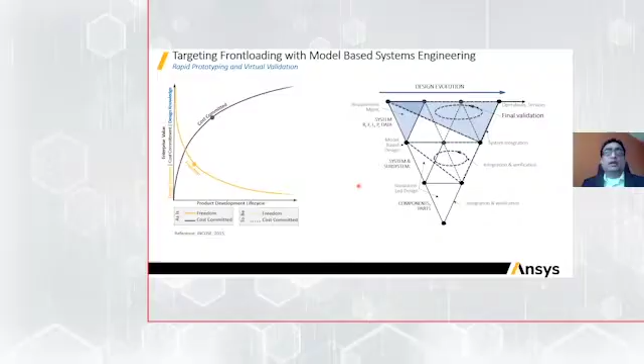Because of these gaps in the current design process, lots of cost items get committed very upfront, at a very early stage. And as the cost gets committed, freedom for change in the design, freedom for change in component selection gets reduced and restricted. Here, the validation exercise comes towards the end, and as mentioned, validation is very expensive.

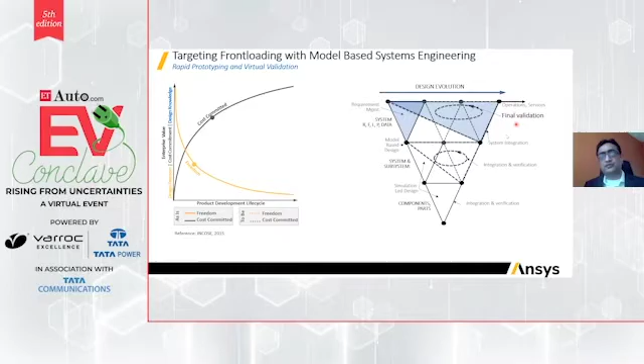So to deal with this problem, companies are now moving to what we call virtual prototyping or rapid prototyping. I must give a disclaimer that rapid prototyping here doesn't mean 3D printing, since that term is also used elsewhere. What we're discussing is: we essentially bring our last validated design, if a virtual validation platform exists. We take the last validated design, then bring in the new requirements, and change a few modules or components in a virtual mode, and check if this change meets the new design and performance validation requirements.

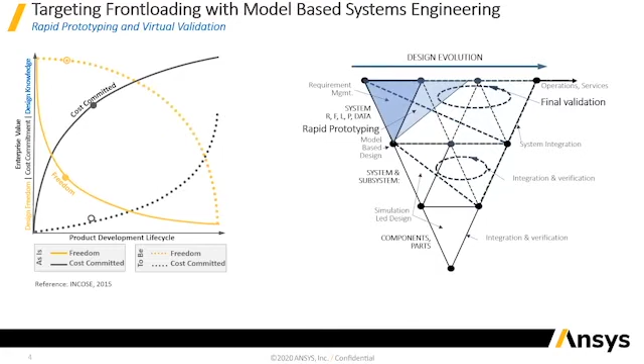So this can be done at a very early stage. And if you can see over here, by doing this step, the design flexibility increases and cost commitment at the early stage decreases. This blue new triangle represents rapid prototyping. That's precisely the change from a constrained design process to a more flexible design process, carrying knowledge from the old system to the new system.

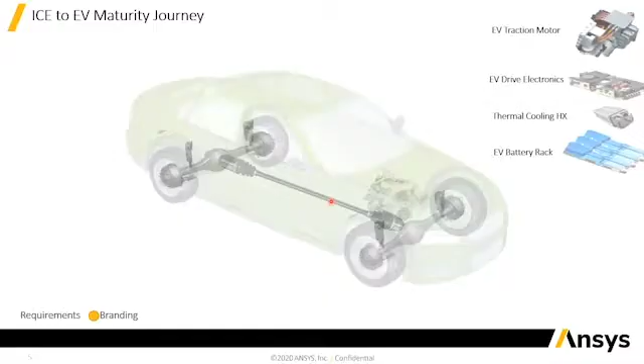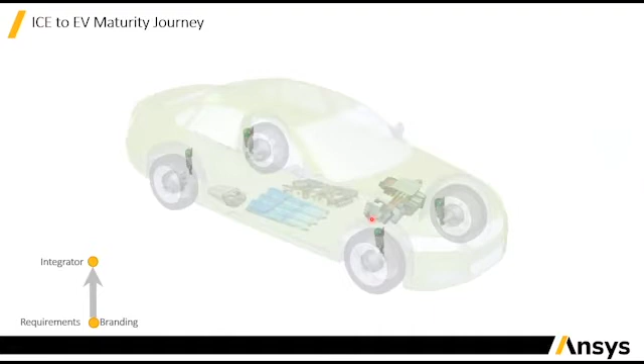Now let me share what happens specific to EV. An EV requirement typically starts with branding and then what sort of vehicle segment it is. Post that, it's mostly a case of an ICE vehicle being converted into an EV. So majority of companies in the world, and in India also, start as an integrator. Many design components like motor and battery are outsourced and those components are integrated. This process has the advantage of outsourcing the design and accelerating time to market, but it also has its own challenges, like achieving system efficiency, range, and related issues.

Moving forward, OEMs are moving towards more in-house designs. So in in-house designs, all components are designed and developed, and for that, extensive virtual simulations through FEA, CFD, and electromagnetic analysis are done.

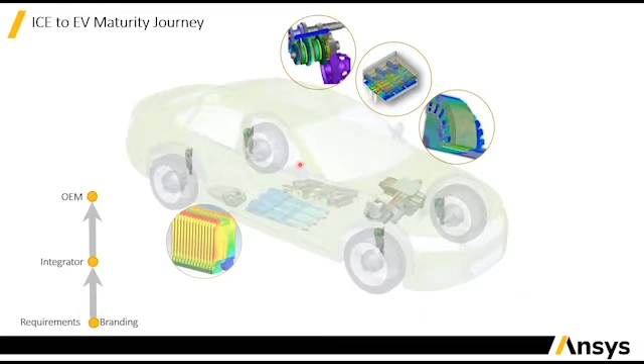And these methods are quite well evolved, quite well developed. Best practices are in place. Due to a very large number of design combinations to be studied, because of a complex interplay between hardware and software, MBSE methods are taking over as a key design process development.

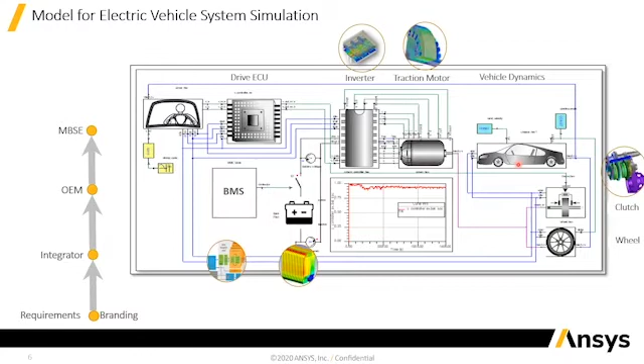Here MBSE is described in a block diagram. All critical components like EV drivetrain, battery, motor electronics, inverter, clutch, wheel, mechanical, vehicle dynamics are integrated, along with the software component. One of the most important things to remember is we are not leaving behind the 3D studies described earlier. In fact, all 3D studies can also be integrated into the MBSE framework through lightweight behavioral models derived from these 3D studies.

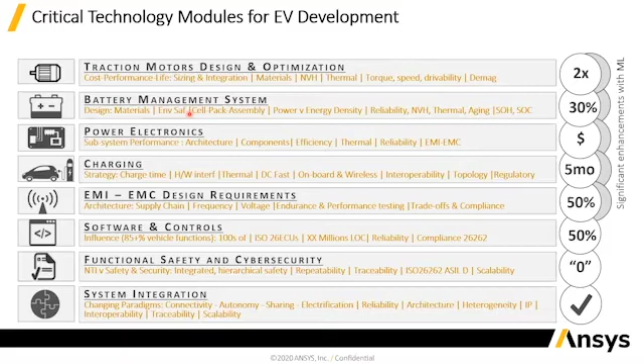Let me also briefly describe the critical modules of motor and batteries. I won't get into detail, but just to mention that when you don't have a physical component ready, when you're in design mode, these are simulation practices that are proven and practiced globally, with strong metrics like time to market or cost saving. What we're seeing is that if we combine machine learning further, the return from this component level design process increases considerably.

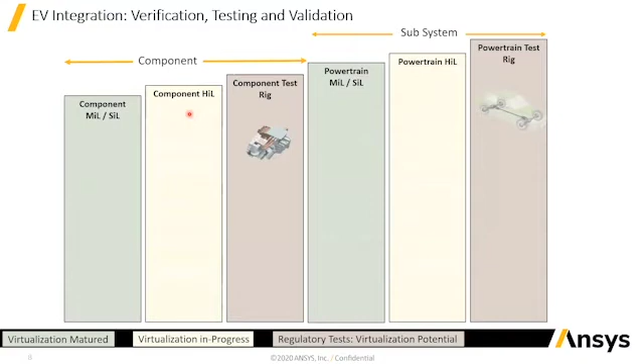Next I'll show how component level design processes can be used in verification, validation, and testing methods. This is a kind of standard testing scenario that all typical EV models have to go through. It starts with component level model-in-loop, software-in-loop methods, component level HIL, and then rig design.

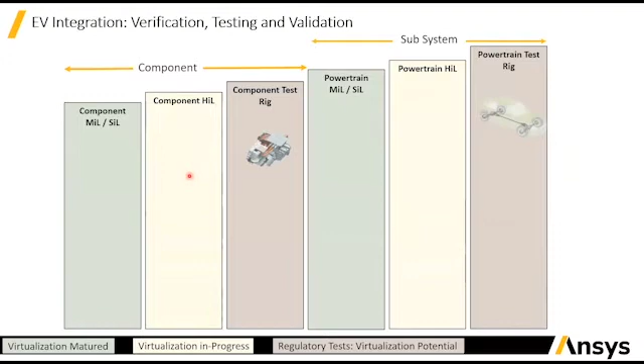If you dissect this further at the component level, motor and battery subsystem designs are first verified, where both software and physical components are studied. Hardware components are studied through low fidelity models, but the trend we're seeing globally is using high fidelity models through 3D simulations, or test data if available, but most likely not, since this is early stage verification and validation. That's how it's helpful - before any prototype, you could do model-in-loop and software-in-loop. Similarly, for hardware-in-loop, the same simulation model-based behavioral models can be used.

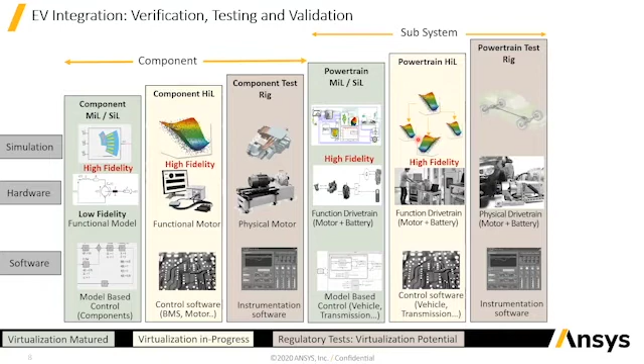What is the advantage of doing this? You don't have to wait for a motor to be built, put on a bench test, generate an efficiency map, and then do validation. Much before that, you can assess the performance of the motor and battery. The same way, you can assess the performance of the entire powertrain subsystem, including power electronics, motor, and battery together. Going forward, finally, the vehicle subsystem and vehicle system level test, where you also include vehicle dynamics and road conditions.

So essentially, in this entire map, MIL and SIL for component level and powertrain are already virtualized. HIL methods are in the process of being virtualized, where more virtual plant models are getting used. I'm also going to talk about the entire virtual system model, how you can create scenarios, put in the terrain, use the software plus other models developed throughout your product development cycle, and integrate them to do a virtual system study test.

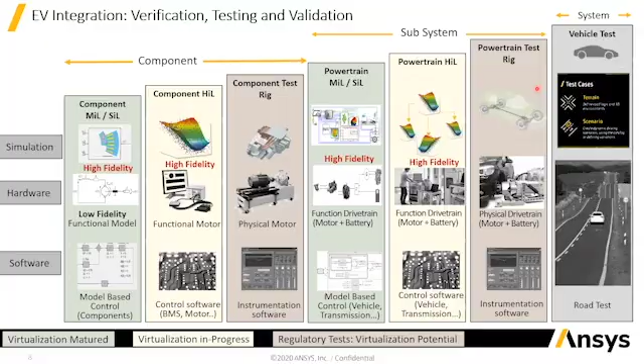This shows a model structure for virtual performance validation. We're not getting into detail, just want to highlight that in this model structure, you can have a driving scenario sitting at the top that interacts with the vehicle controls, vehicle dynamics, and BMS motor controller, which is integrated with the physical models for battery, motor, inverter, transmission, and so on.

This physical model comes from either 3D simulations - the most likely scenario if you do not have any prototype ready - or it can use test data, or even 1D low fidelity models if the 3D models are not ready. That's how the model stack and platform are generated.

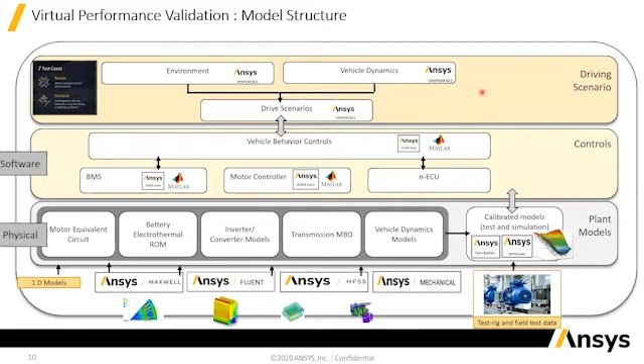Once this platform is generated, it takes time because calibrations, model best practices, and component model fidelity are all very important for a robust and accurate virtual validation platform.

Once the virtual platform is ready, that has a huge advantage. It provides the ability to perform a large number of drive validations, like vehicle parameters, wheelbase and size, requirements, acceleration demand, road conditions, new vehicle requirements, or change in requirement midway through product development, or even meeting the constraints required by safety. Everything can be studied in a virtual mode.

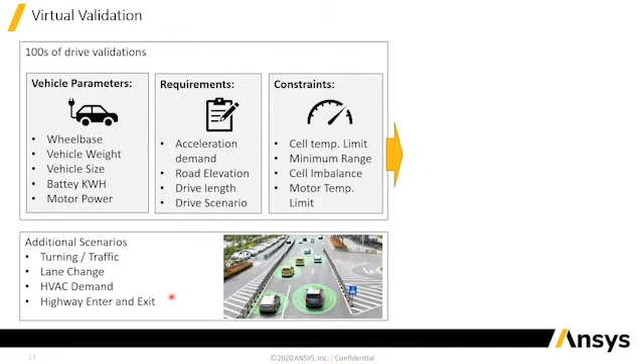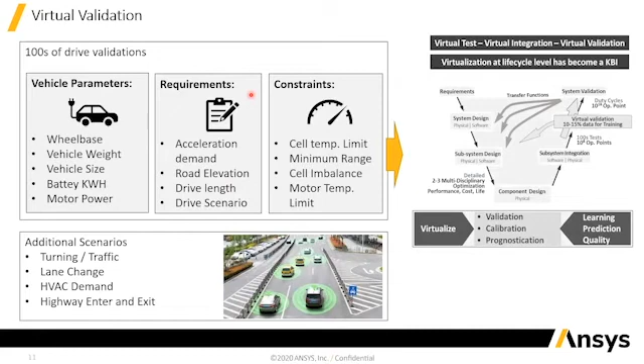And not only that, you could add scenarios beyond EV, like if you integrate autonomous scenarios as well, sensors, lane change, traffic, HVAC demand, and so on. This provides huge flexibility, and finally results in a robust virtual platform that can be extensively used for validation, calibration, and even extending to prognostication of the vehicle and vehicle components.

So how is it done? I'll share a short video, but before that, this can be done by combining all vehicle models, be it motor, battery, BMS, inverter, ECUs, vehicle dynamics, combining that with the vehicle environment, and combining it with the software development. You can then use AR, VR technologies to create scenarios. For the scenarios, you could use OpenStreetMap.

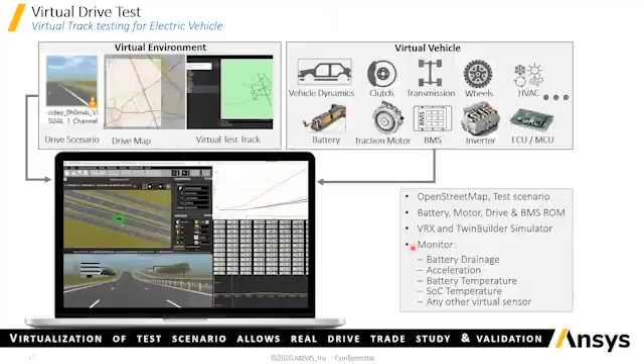Over here, we have used VRX and Twin Builder Simulator in this example. You can use this platform for battery drainage, acceleration, checking battery performance, range, SOC, temperature, or any other virtual sensors that otherwise you would want to test in the physical world. So let me move to the short video demonstrating this entire capability and workflow we discussed so far. Let me start this video.

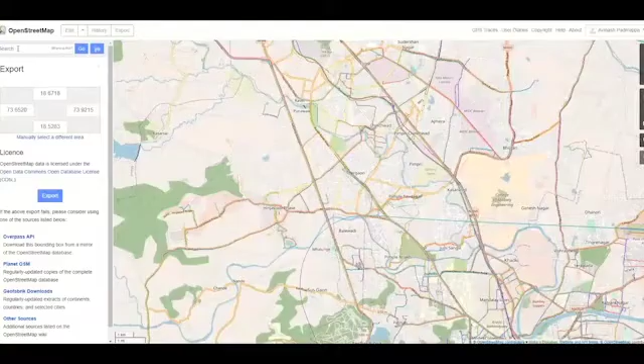So here we start with creating a virtual scenario. In this demonstrator we have taken a small patch near Pune on the Bombay-Bangalore highway, and this patch can be imported to create the scenario. The scenario we are creating has a certain set of elevations. We can add road details and so on.

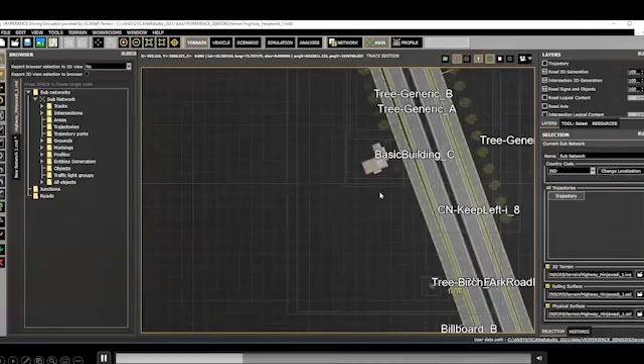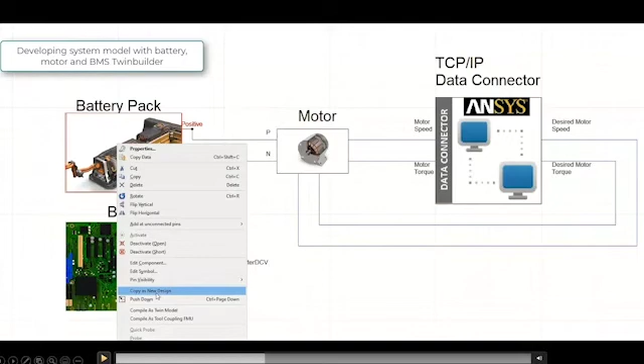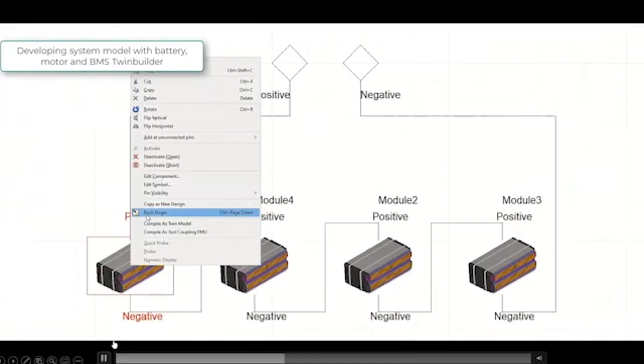Post that, we are now integrating the EV powertrain model. So first we created a scenario, now we are integrating the EV powertrain model. So here we have a battery. If you click in, you will see the 4 modules, and each module, if you go in more detail, would have about 80 cells or so.

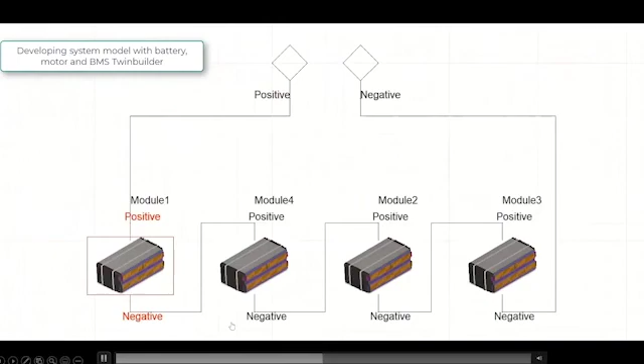And each cell here has a physics-based model, either coming from Fluent or electromagnetic simulation in the motor and so on. Each component has a physics-based model. Everything here is integrated along with the vehicle dynamics as well as the road scenario.

So what it would look like finally is what you see over here. You can define the scenarios, and see the vehicle moving over here. As you move, you can see the temperatures of all the cells over here. Temperature, SOC, all battery health parameters can be measured for all cells.

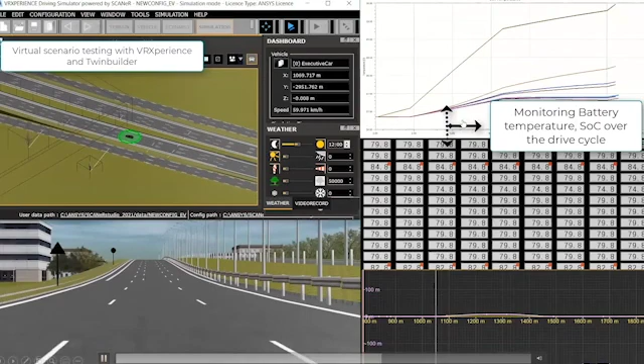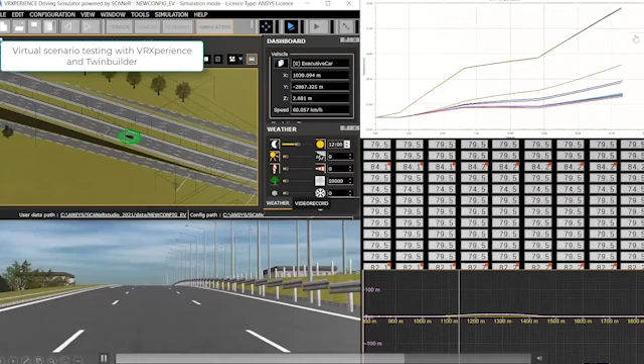I'm also dynamically plotting the temperature for a certain number of cells, and it shows that as the elevation increases, the power requirement increases, so the battery temperature also increases, and as the demand for power reduces, the temperature automatically starts dropping for the battery, as you will see in this virtual scenario simulation.

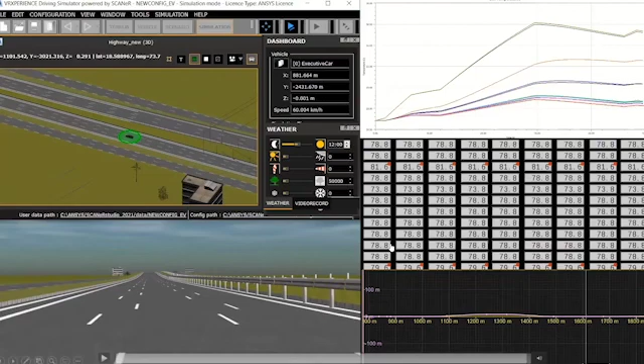So what we have done here is combine physics from each component, combine the software from each component, combine vehicle dynamics, and combine the scenarios and maps, finally creating virtual use cases which will be used for verification and validation of the EV performance. So with that, I'll end my talk.

Thanks for your time and attention, and I hope it provided good insight into where the industry is moving towards adopting the virtualization of verification practices. Thank you.